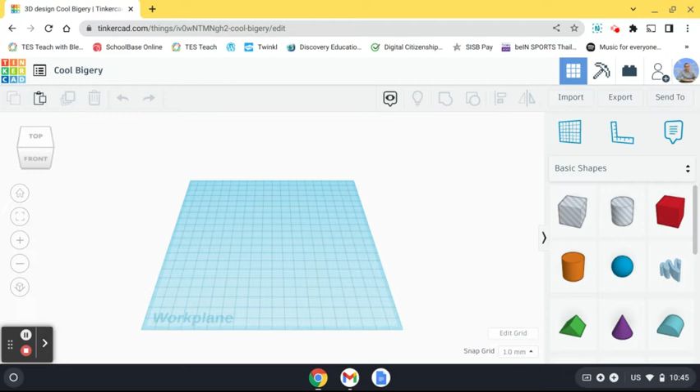So you log into Tinkercad and you click create, and then I'm going to get a square. I'm going to put my square in the middle. I'm going to drag it out and reduce the height of it.

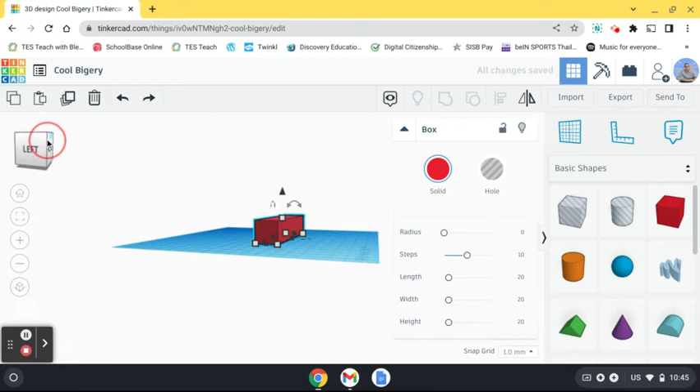So I have a large block there, and like I said, it's a bit too high, so I'm going to reduce the height of it now. At the moment it's 20 millimeters, I'm going to reduce it down to 10 millimeters.

Good. And I'm going to make it a little bit wider as well. At the moment it's 20 millimeters, and again you can write in here if you want to. I'm going to make it 30.

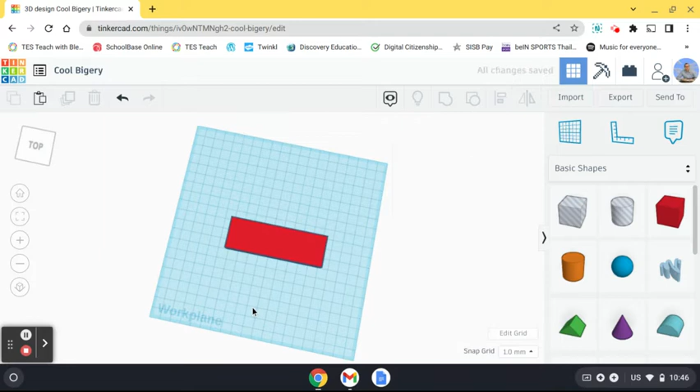Okay, great. Now I'm going to write my name on top of it, so I'm going to do some writing on top of it. I'm going to need to use the workplane, so you click the workplane and then you click the workplane on top of that.

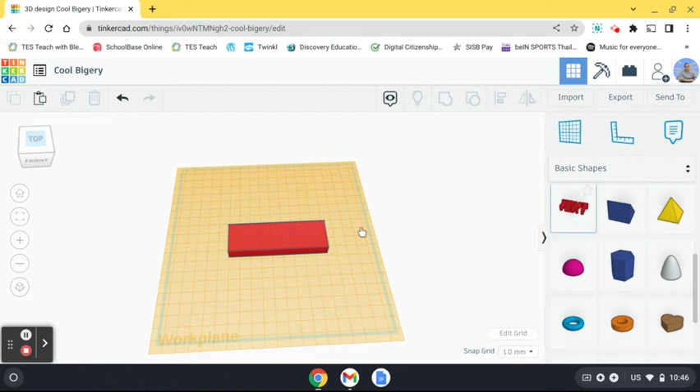And that's exactly where your writing is going to go. Now there are two ways of doing writing. I'm going to use the letters, shapes first, and after that I'm going to show you how to write freehand as well. Let's go to the text. There we are. So you click text and you put it on top. Boom. Okay, and I'm going to write my name, which is teacher.

Teacher. Okay, and you can change the color of that because obviously red and red doesn't work so well. Okay, and then you drag it in a little bit, drag it over a little bit, make sure it fits on there nicely. Okay, let's have a little look at that.

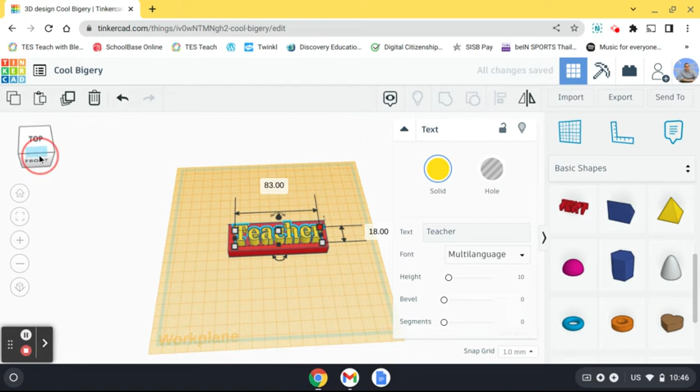Okay, we're happy with it. And obviously you'll look at that and you'll see it's a little bit high there, so I'm going to reduce the height on that as well. At the moment it is 10 millimeters, I think I'm going to drop it down to about 4 millimeters. And there you go, that's how to make a nice, simple name tag for yourselves.

Now I'm going to go back to the workplane. I'm going to show you another way that you can do this, okay, doing it freehand. So I'm going to make a copy of this shape which I wrote teacher on. I'm going to move it down. So you see there I clicked the copy icon, and now I'm using the arrow keys to move it down.

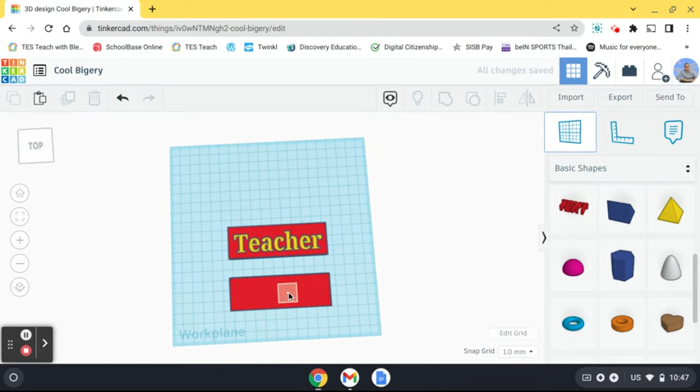Okay, and I have another one here. I'm going to use the workplane again. I'm going to put the workplane there, but this time I'm going to use scribble. So I click scribble on here, and it opens up this image, and this is where you're going to write.

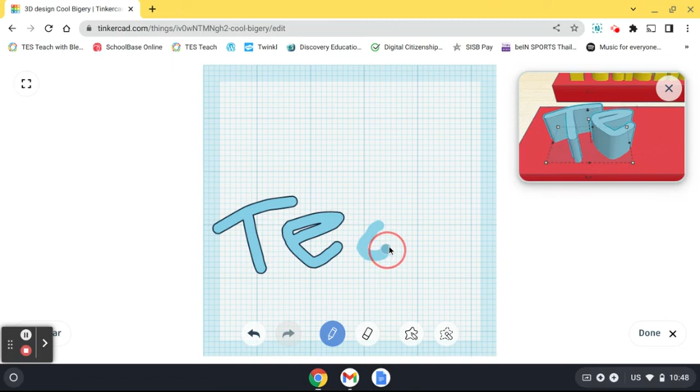So I'm going to use freehand to write teacher. I think I'm just going to write teach because I'm running out of space. Oh, hold on. Oh yeah, you can extend that. Okay, and obviously my writing's kind of ugly there, I'm sure you guys can do much better writing than me.

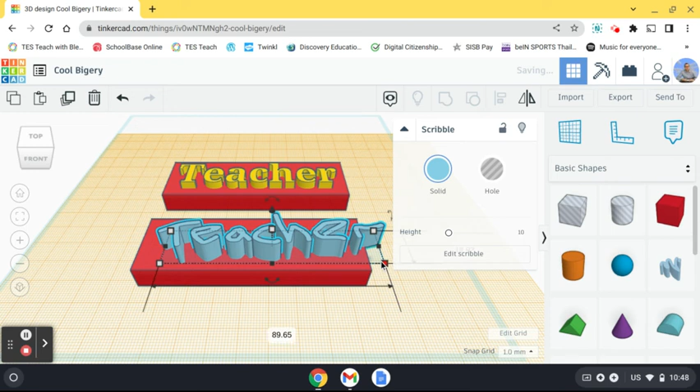But there you go, I have my teacher. All right, oh yeah, that's not too bad actually. That's not too bad. Okay, and I can extend it and get it set up the size I like it. Have a little look again, again it's a little bit too tall.

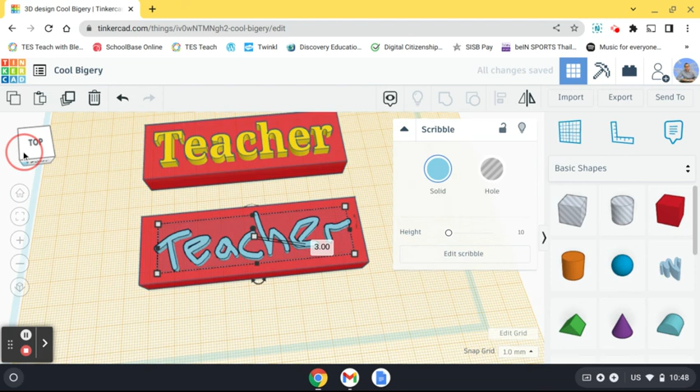So how tall is that? I'm going to reduce that down to just 2, I think, or maybe 3. Okay, great, move it around. Fantastic. Like I said, I'm sure your writing will be much nicer than mine.

But there you go, that's how to do it. That's 2 ways that you can create a name tag. And this is really kind of the most basic first lesson for Tinkercad. So please go ahead and do that.